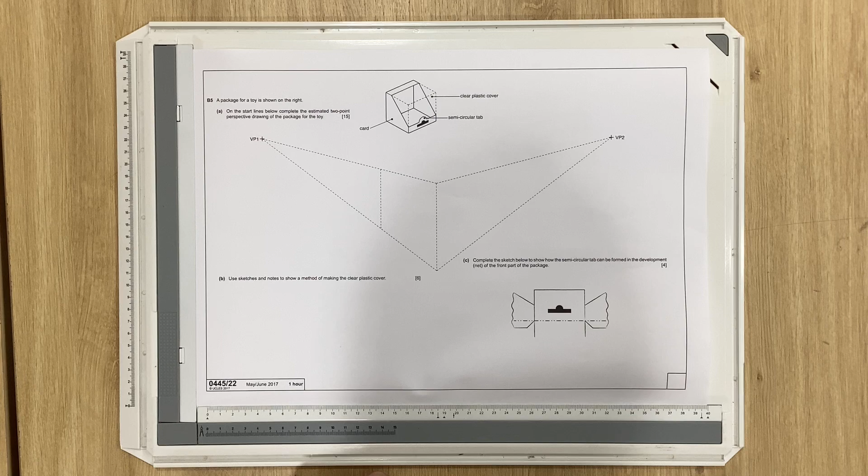Today we're going to look at this question here. So it says, a package for a toy is shown to the right. And we've got this isometric drawing there, some packaging. On the start lines below, complete the estimated 2-point perspective drawing of the package for the toy. So it's saying estimated, so the dimensions aren't really that important as long as you get it roughly right.

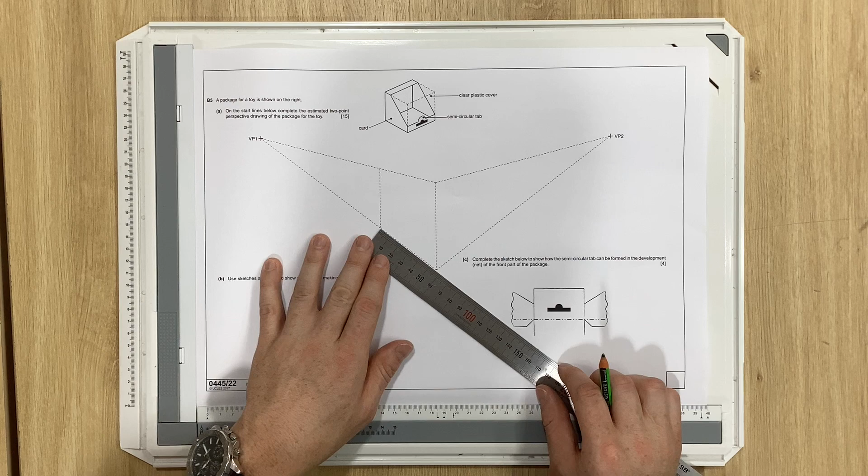So we can see this looks like a square, and we've got this part here, which is that section. So first thing we're going to do is we're going to look at this side. So I'll measure this, and that there is 56 millimeters. So I'm going to go along here, 56 millimeters, put a mark, and then get my 90 degree and put a little line up. So I need to complete the box.

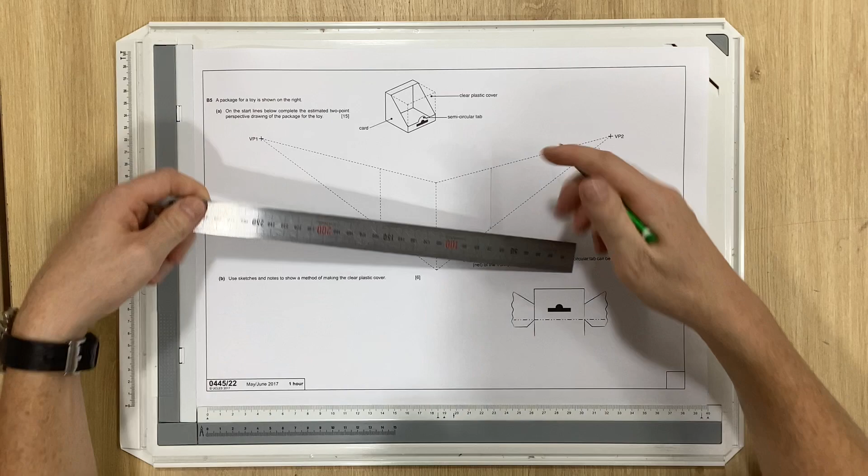So from this point here, remember anything that goes to the left goes to vanishing point 1, anything to the right to vanishing point 2. So I'll put my pencil here and go along up the top, and the same other side. So from here along to there. So now we've got just a square box.

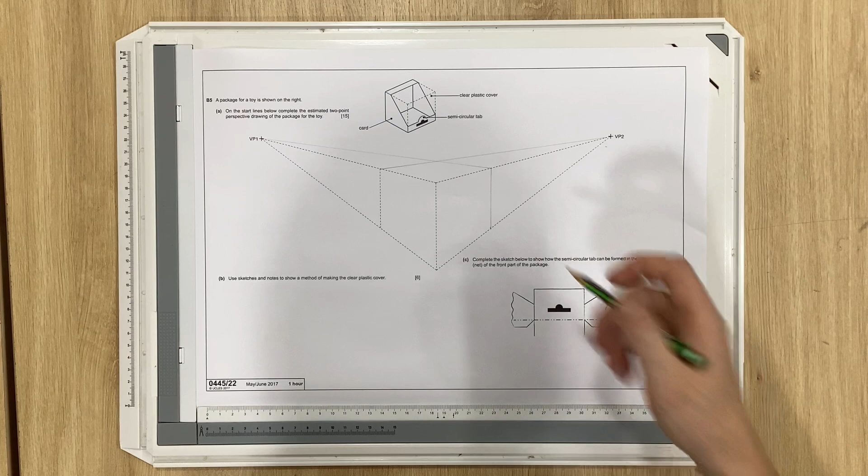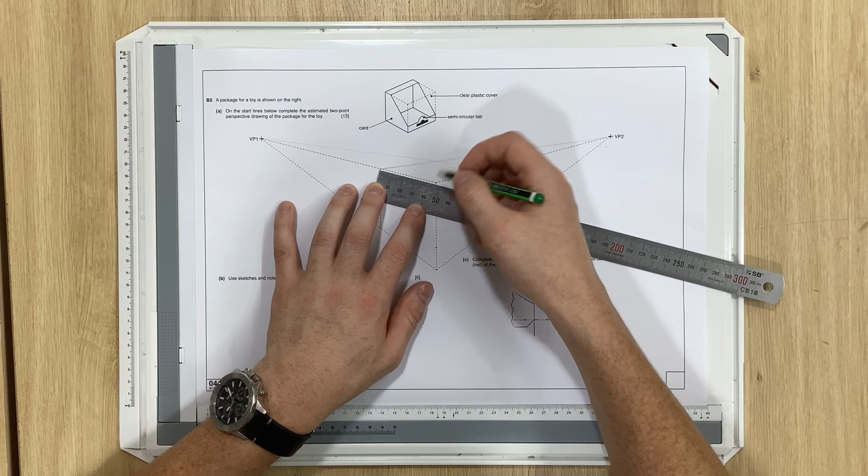With this now then, we can see this section comes down. So working roughly, that's about halfway, that's about a quarter. So it's estimated, it's only a rough thing. So this overall height is 70, so half 35, a quarter about 17.5. So if I measure, roughly 17.5 is about here. So remember, it's like a quarter again, so this bit here, that's 46, half 46, 23, half of 23, 11.5-ish. So there, roughly. So what I can do now is join these two bits together.

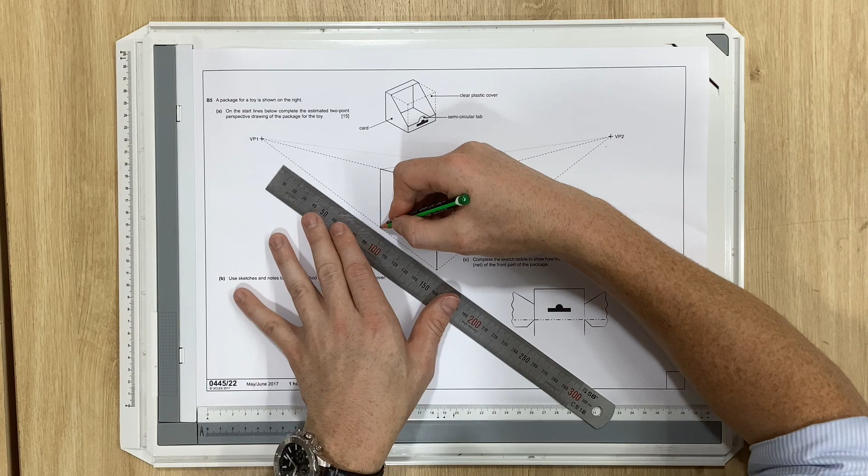And I'll quickly just put the side profile on, because that is the side bit done. So this section. Along here. So that's the side bit. So what we need to do now is we need to put the front part on and this top part on of this bit we just did.

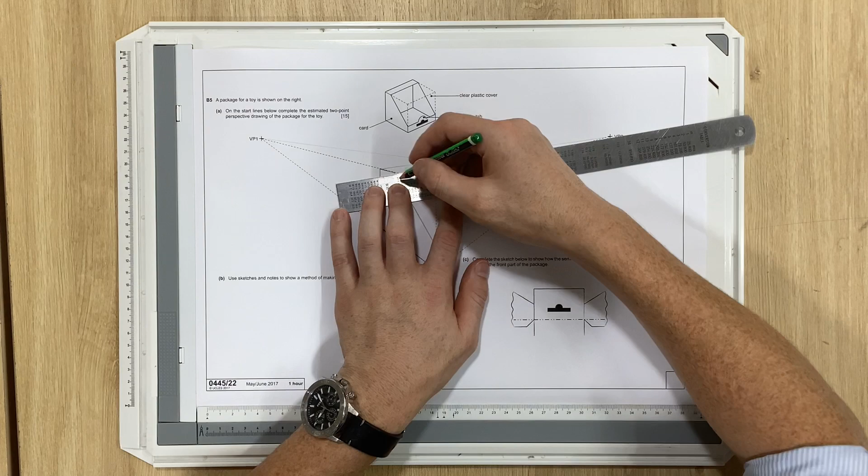So because it's going to the right, it goes to vanishing point 2. So I'll line it up here, vanishing point 2, line to there. Same up here, so vanishing point 2, go along like that. So now I've got my next two marks to put the slope on. So I can join this bit to there. So now we've got that card section and we've got this bit. What we need to look at next is this front bit with the curve on it.

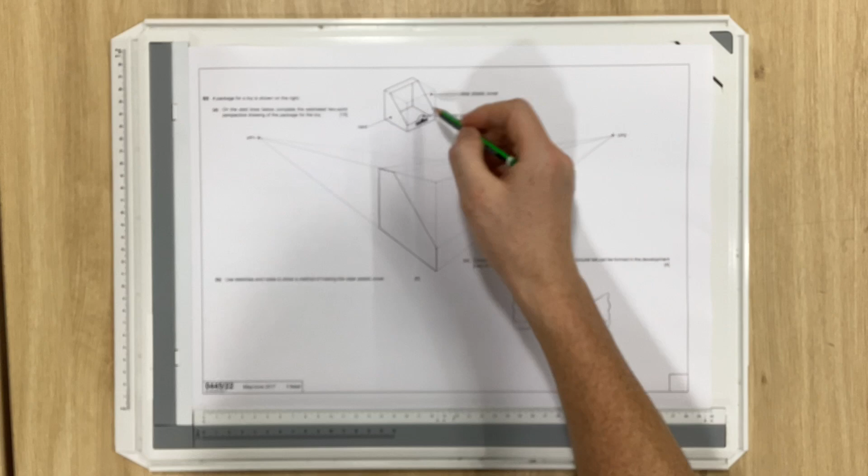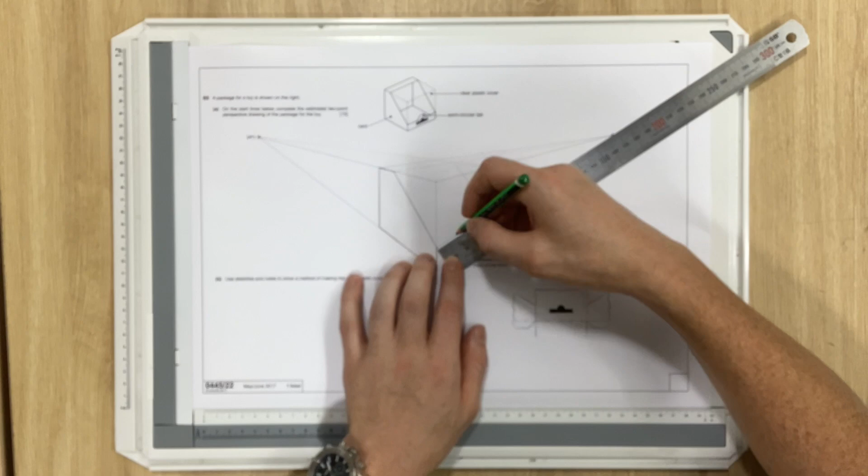So the semicircle tab part is in the middle and it's a semicircle, so we need half a circle. So what I'm going to do is I measure this part here, which is 50, so the middle is 25. Then looking at this, it's about just under a third. So we said 50, so if we do it sort of 15, 15 either side, 20 either side, so 20 that way, do it 20 that way, we end up with this bit here. So this part here now is 12 millimeters wide.

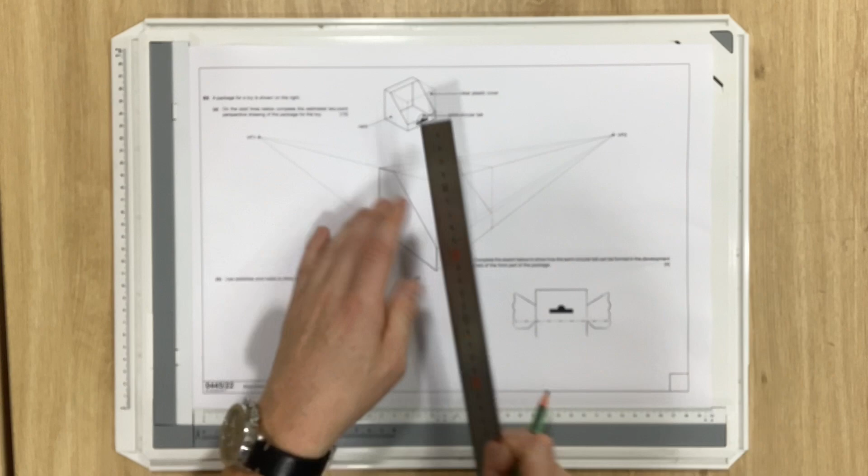So we're going to make a little square here. So I'm going to go up 12, which makes a little box. So I've got that bit there. So then I'll go to my vanishing point here. And we'll put a vertical line in here and in the middle. So what we're going to do now is just draw a semicircle here, quarter of a circle to there, and a quarter circle there. So just carefully sketch on there and sketch down there. So what I can do now is go over this front line heavier. This part there.

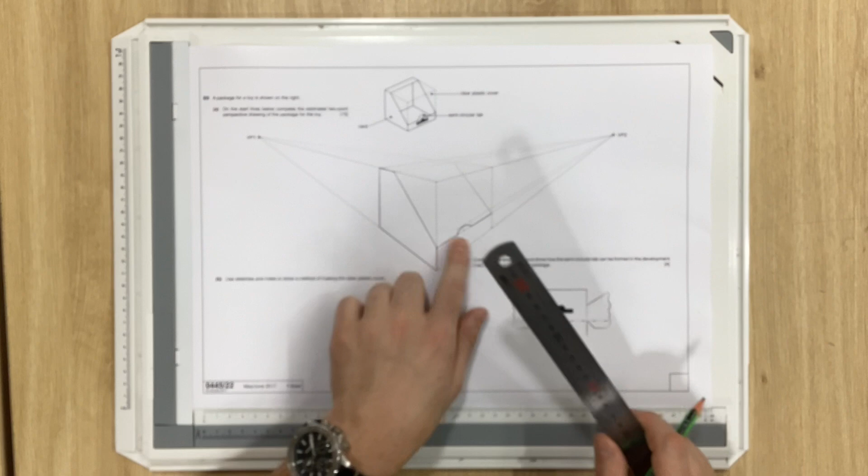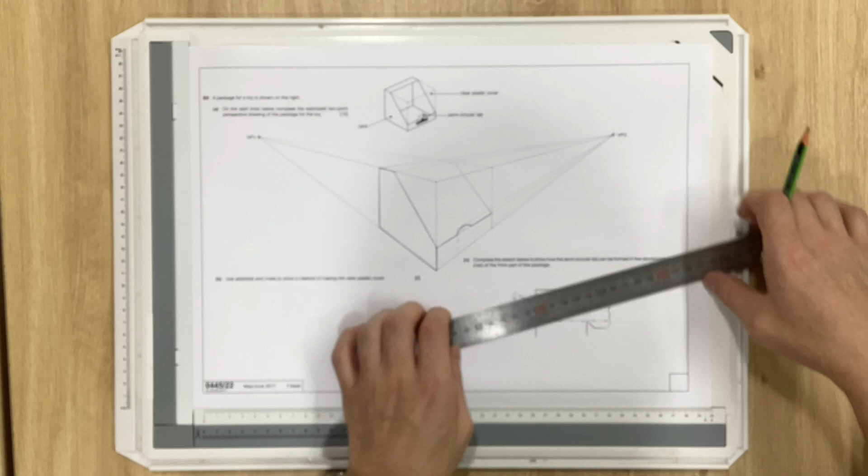And the next bit then is we've got that bit, now we need to do this circular tab underneath. So again, that looks about a third. So this is 15, so about 5 millimeters. So if I measure 5 there, I'll put some construction lines on. Nice and faint. Go into the vanishing point on the right. So you can see this tab at the bottom is a little bit wider. So I'll do a little line here. And similar above. Put a line at the bottom. So that mark in the middle there, so it's the same here. Let's put a centre line.

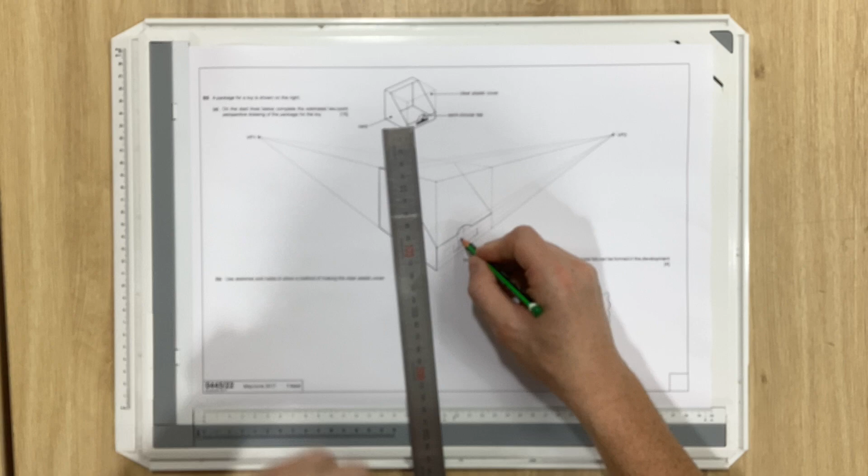So now we're going to curve the bit here. So do this a little bit smaller. Smaller on there. So probably do this about 5mm wide. So then this top about 2.5 to there. So I can curve that to there, that back down to there, and join these two up.

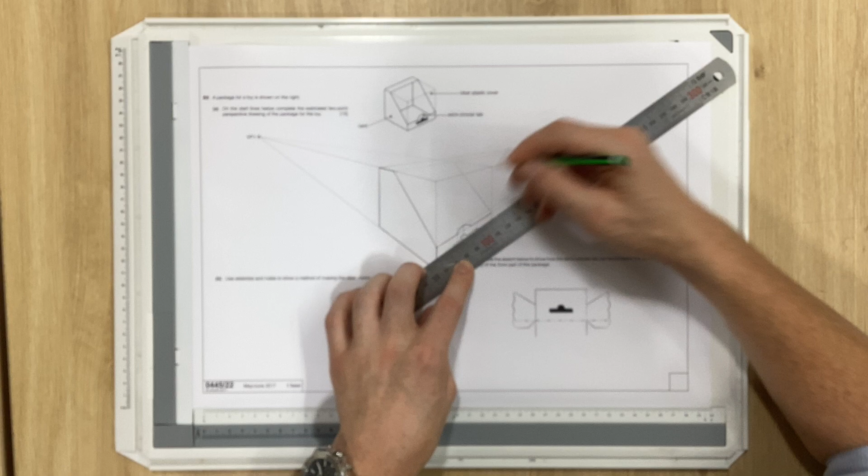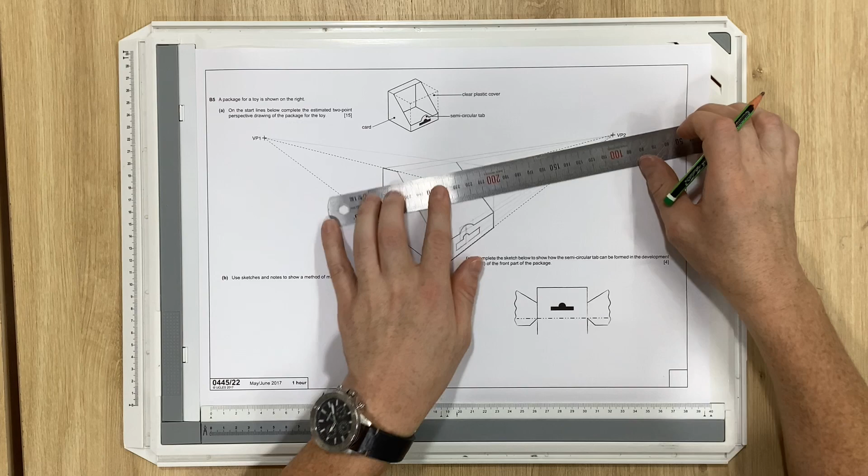So what I'm going to do next is go over the rest of the box heavier. So I did that side heavier. So now I've finished the front part. And go over this. And that part. This bit up there. And finally here, here. And lastly, this bit here.

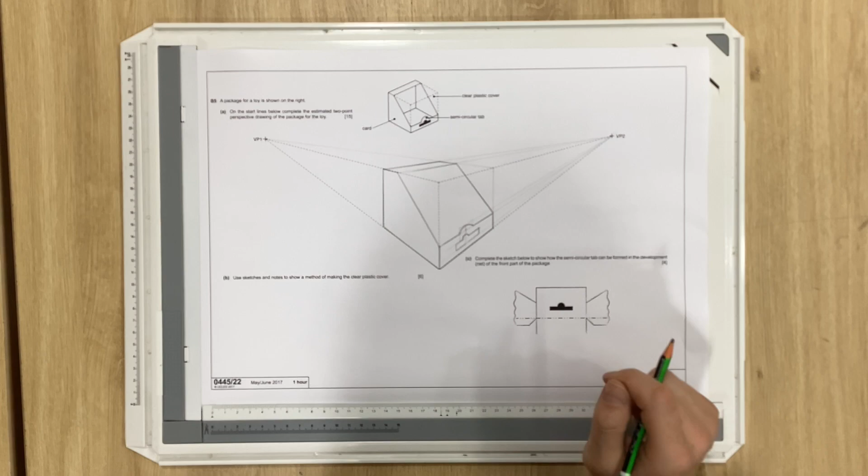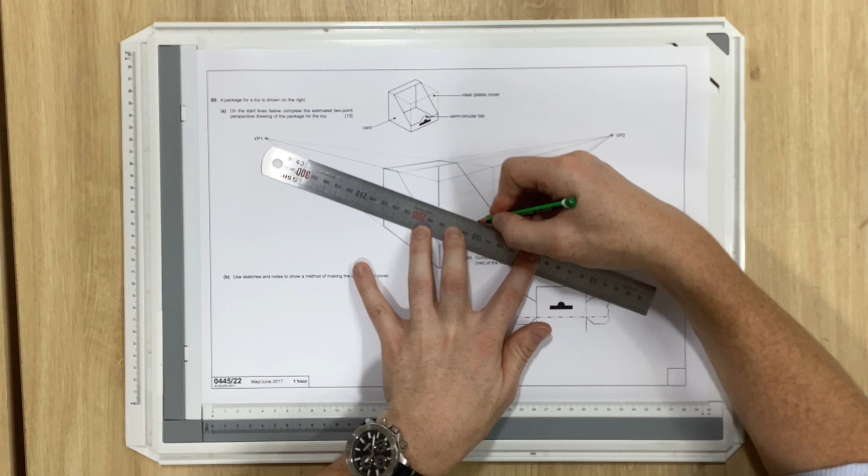Right, the last little bit missing is you can see the inside of the box there. So we need to put those bits in. So what I'm going to do is go from this corner up to here, put my construction line in, this corner up to here, put my construction line in, and that should match up with this bit. So that bit's faint to start, then heavier to there. And we can go this part heavier, following that line, and finally this part heavier, following that line. And now everything is complete.